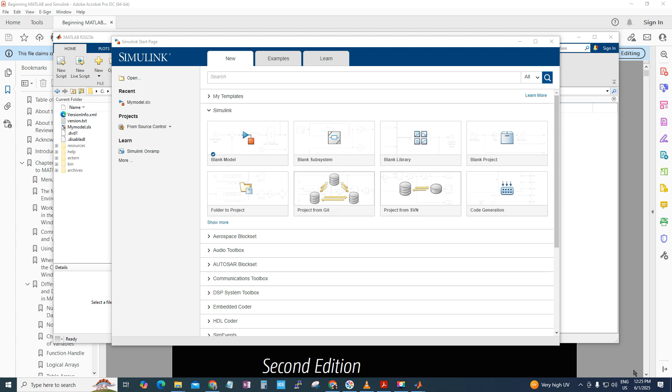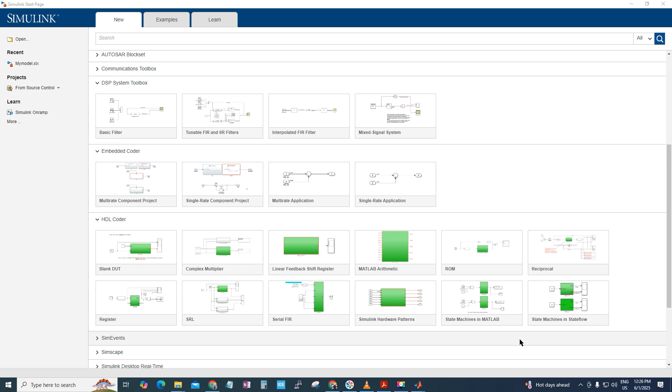First you will come here, to the Simulink start page. Here are some templates you can start with. If you scroll you will find filters, feedback shift registers, multipliers, state machines, and a blank model. In Simulink there is also 'new' and examples available here for learning, so we'll go to new and open a blank model.

When you open a blank model, a blank window will open like that. Just to show how easy it is to open a model, I will start with a blank model, and this is how you see a canvas. As the first step I will save my model, so you can give it any name here, like 'first model', then press enter.

If you try to save now, it will not save because it is an invalid name. So how do you save it? You should not put a space here. Save it again, now it will save. Make sure the name is different and does not contain a space. It will save in the same directory where we are working by default.

Basically this is a block diagram environment. If you want to bring in some blocks, you can just click here on the library browser. It will open like this, a library browser list, and if you click this sign it will open a similar library browser. Simply click here on 'library' from the menu, then 'library blocks', and in Simulink if you click any one, it will open the blocks available. There is not only Simulink, but some other products we can work with as well, also available here in the blocks.

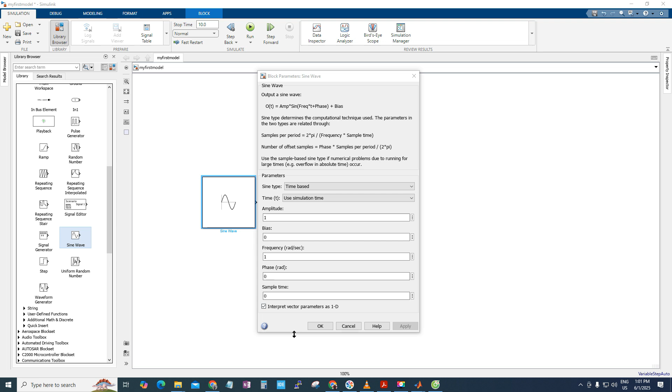For that I will just use the sources library. This block acts as a signal source, so we'll use the sine wave. Just select it, drag and drop it here to bring a block into my model. Simply double click and it will open the block parameters for the sine wave, where you can find the amplitude. I will ignore that and use the default value, which is 1.

I will bring another block for amplification of this wave. Another good way to bring a block in is to just double click your mouse on the canvas, which will open the search bar and a search block with a magnifying glass. You can bring in another block which you want to use if you already know it, so I will use a gain block here.

Just type 'gain' and it will open these blocks. Click here and it will open the gain block. When you bring it in front of the signal, an arrow automatically appears. Just click on this arrow and it will be connected. As you already know, gain is used to multiply a particular value by a factor.

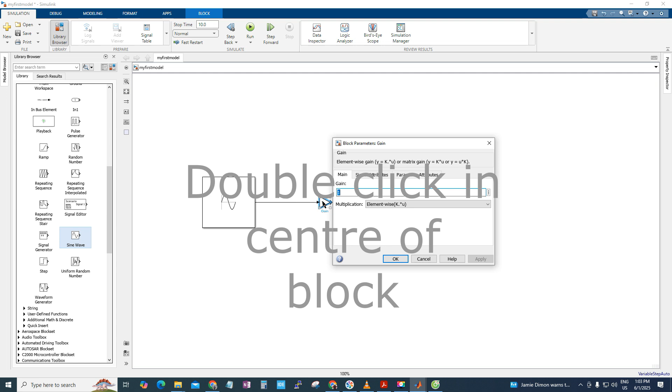Here you can see the factor is 1. Just double click on this field, it will give you the block parameters for gain, and you can set how much you want. I will put here 3, which will multiply by 3, so it is showing 3 here. Otherwise, just select this and you can also change the gain value directly.

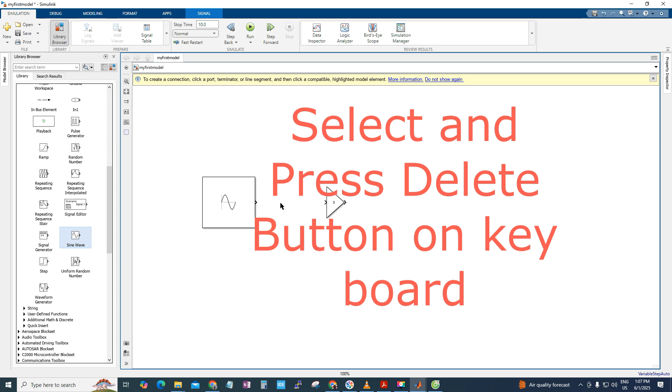There's a different way to connect the signal. I will delete it, and you can see here, you can just drag the signal to connect into the next block, and it will connect.

This signal, after multiplying the sine wave by 3, I want to visualize, so I will use a scope here. Just double click and I will type scope, so it will come.

Different scopes are available. I will use the first one and I will resize it.

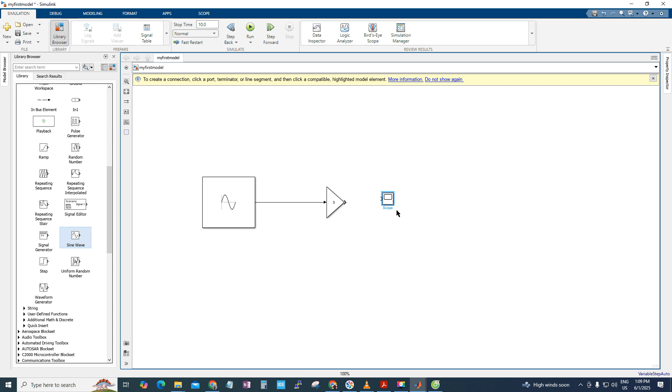You can see an arrow is available here, a link. Just click on it and it will be linked with the scope.

The scope is the most popular way to visualize any signals. This signal, multiplied by 3, and the sine wave will appear here in the visualization in the scope.

I also want to see the original signal. I will connect the original signal here, then I can align them. See how clean the alignment is. You can do it like this.

Another way is to just click here and press the control key, and now you can make another signal line to the scope. Press the mouse button.

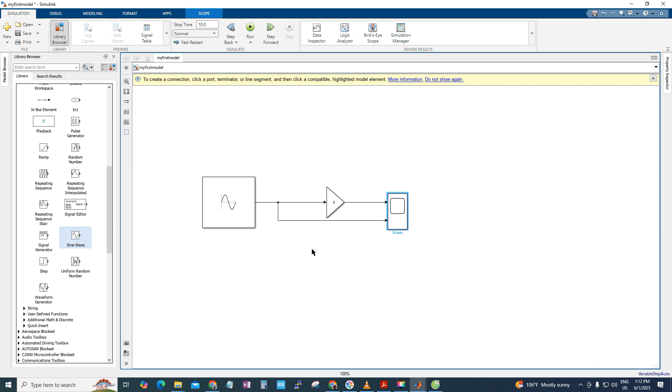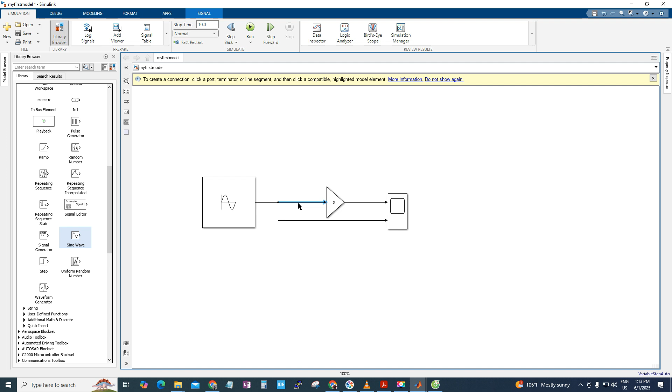Left button, and at the same time the control key, and if you do a left click, you can see you can move the original, but we need the branch from this signal.

So just click here and see it is moving the original. Just press the control button and you can open a branch from here like this.

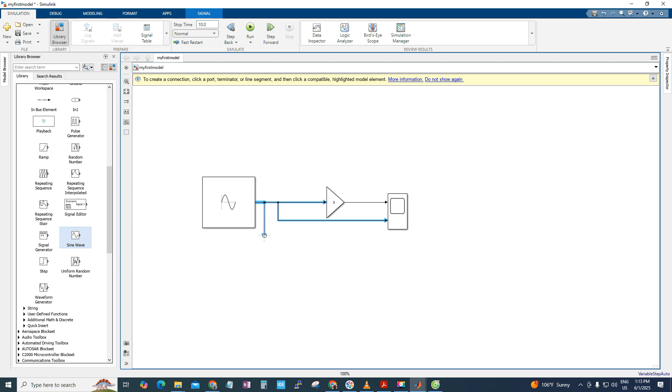I will delete it, it is temporary, and if it is not connected anywhere, its color will be red. After that, just press the space bar and it will bring your model to the center.

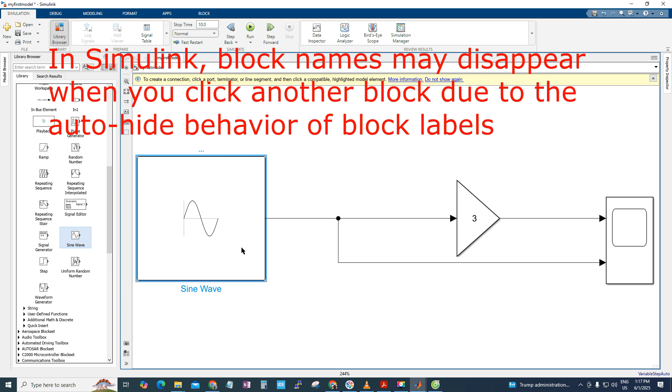One cool thing is that when you click a block, its name is displayed here. When you click another block, this name disappears. Why does the name disappear? Actually Simulink hides the block name by default.

When you click, it is visible, otherwise it will be hidden. This is to reduce clutter.

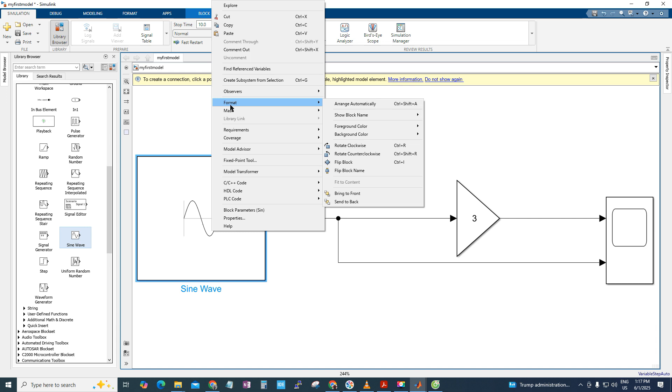So how do you keep it available? Just right click and go to format, then show block name. It is set to auto; click on it so now it will not disappear wherever you click.

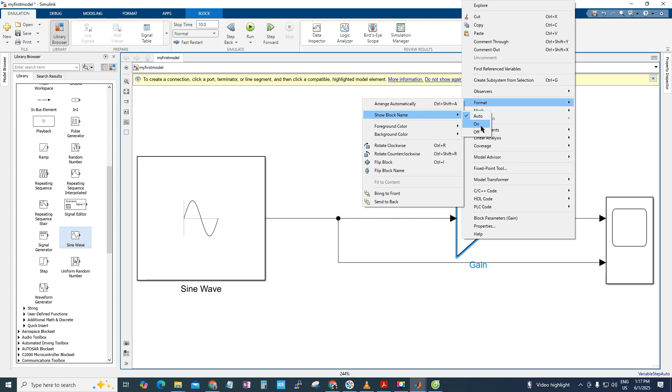See, it appears here. I click here, it is blue color, here black color, but when I click somewhere else, that one disappears. So go to format, show block name, and click on it. Now your block name will not disappear.

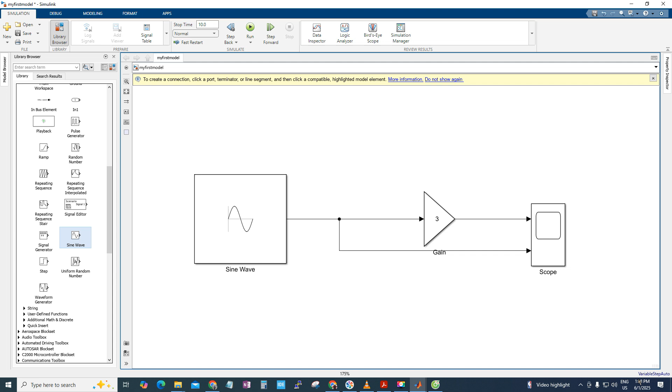By scrolling the mouse wheel, you can change the size of the display. After that, just close the library browser.

Just double click on your scope, and it looks like this. Initially I display it once. Just play the sine here, and after running you can see this.

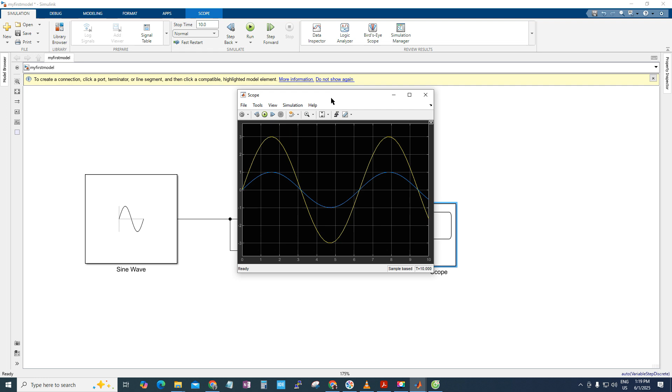There are two lines. One is our original blue color sine wave signal, and after multiplying by 3 you can see this, the second yellow one, showing what it becomes when multiplied.

Now I will change the gain. I put 6 here, click OK, then double click. Now again I play. You can see here it is changed, totally changed, the yellow color line after multiplying the gain with the sine wave.

If I just write 1, now you can see this is the previous one, and if I play again, both are up and down. You cannot see the difference.

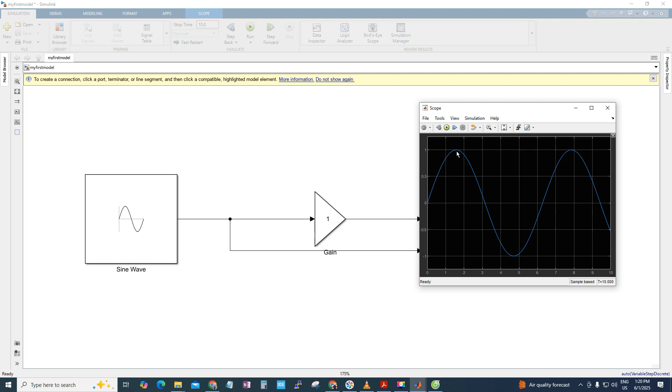We'll put 1.1 here, and you will see both lines are close together. Now I will check here, even though this is the original one, there is very little difference after multiplying with the gain.

You can see here the input of the sine wave and the output after multiplying by the gain, which I showed you already. We can change it.

This is the previous one. Now, you can see both have changed. The blue color is the amplitude, and after multiplying by this, you can see the yellow line defining the factor, multiplying by 3, output here.

I ran the simulation to check that everything is behaving as I expected. It's a very common model.

Everybody, when students start simulation in Simulink, they begin with this simple model. We make changes and we want to check the behavior.

We can see in this model, just play it and it will show you the behavior of your model. Run it and you can visualize immediately how much change is done.